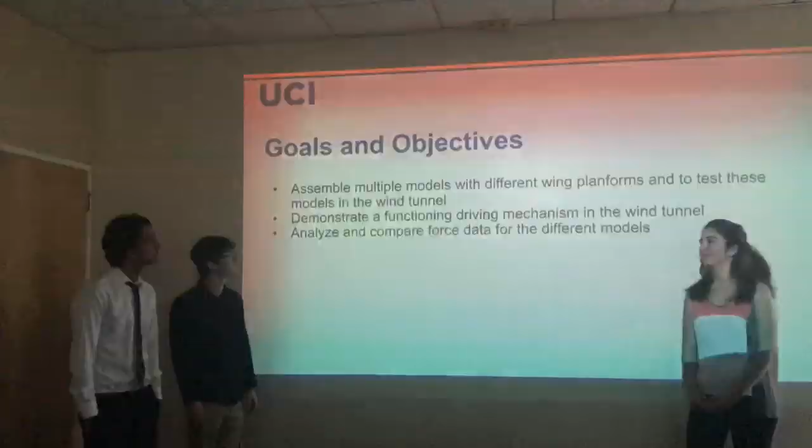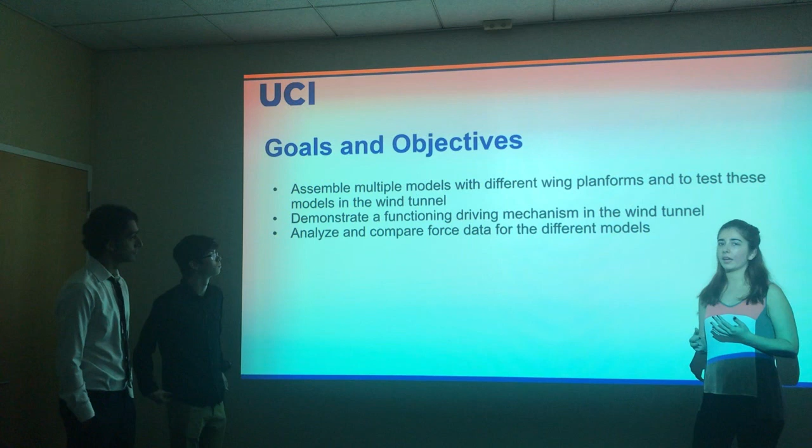So part of our objective is to create multiple models with different wing shapes and even winglets later on over the year, and so we will also be testing these and comparing the data. We are finding 4 forces, the rolling and pitching moment, as well as the lift and drag, and so being able to compare these forces.

For our design requirements, our planes need to be modeled so that they're able to hold 2 servo motors to control each of the driving mechanisms. The ailerons will be held out of phase, and the elevators will move in phase. In order to accomplish our plane assembly, we'll be able to 3D print the models and then put them together.

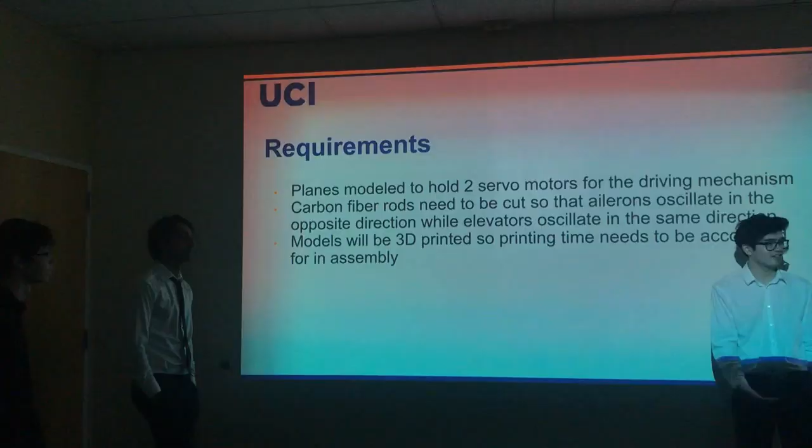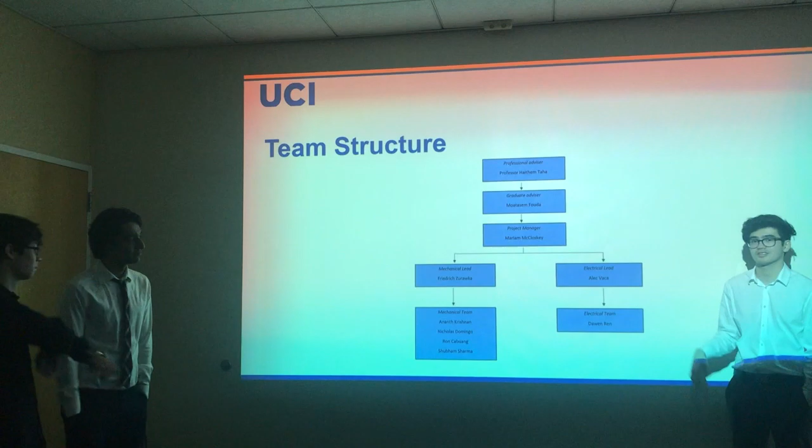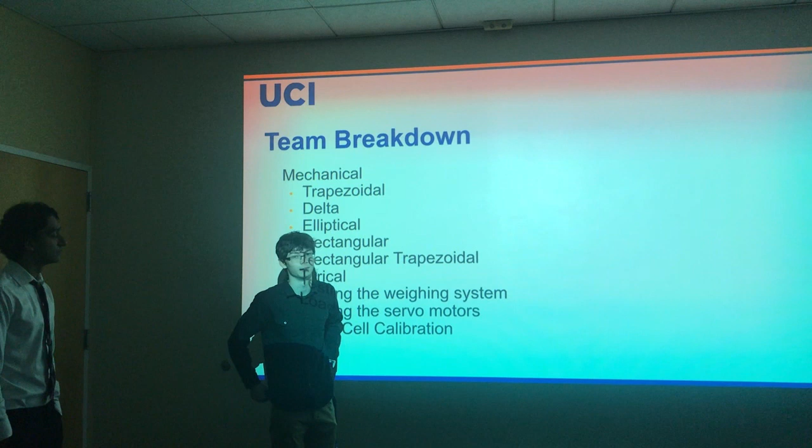For our team structure, all of us in the project report immediately to our graduate advisor, and each subsystem is broken down into project manager and then mechanical and electrical teams. Okay, so for the mechanical side of the project, our goal is just to completely fabricate all 5 plane models, which you can see here. All the names are based off of their wing shapes.

As for electrical, we basically had to create a load cell to measure all the forces on each plane for testing. So we had to calibrate it, and those, as well as the servo motors inside the planes that were driving the ailerons and the elevators, had to be tested as well.

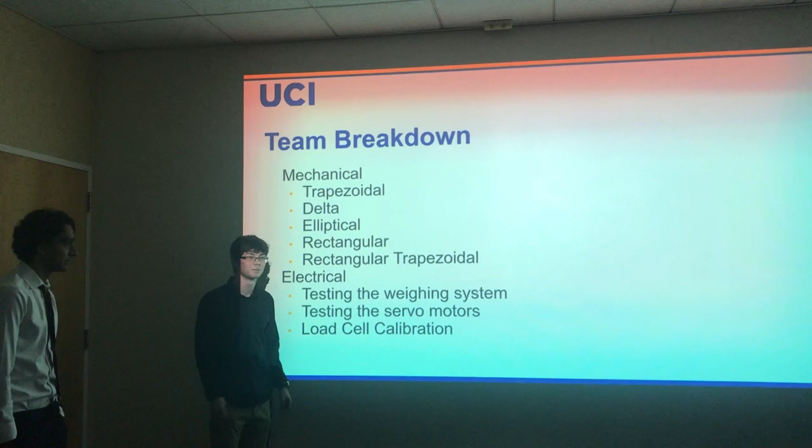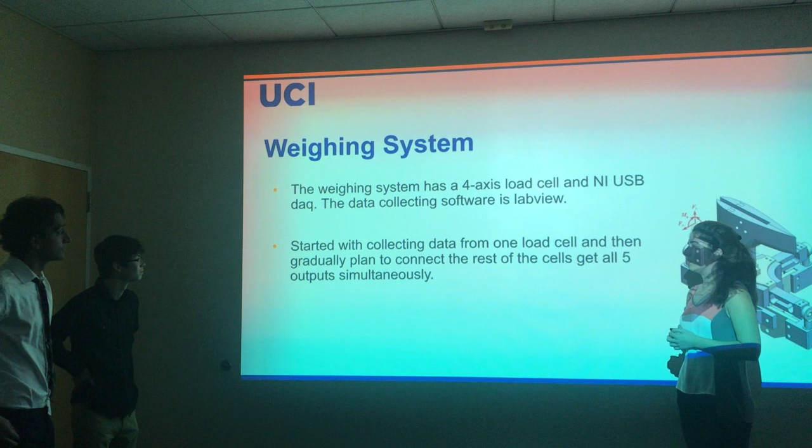Here we have our 4-axis load cell, and so like I said earlier, this will be used to measure 4 forces on the plane. It consists of 5 load cells shown here, constructed all together, and so the whole point of the system is to be able to collect the data that we need. And this has been a continual process, working on it throughout the quarter for the electrical team.

Okay, so the main difference in our models was the wing shape. We have 5 different wing shapes. Those would be rectangular, trapezoidal, cropped delta, elliptic, and rectangular trapezoidal. And the main assembly differences that these caused were the wing shape, of course, because they are different sizes. They caused differences in the fuselage, so that was our main difference in the assembly.

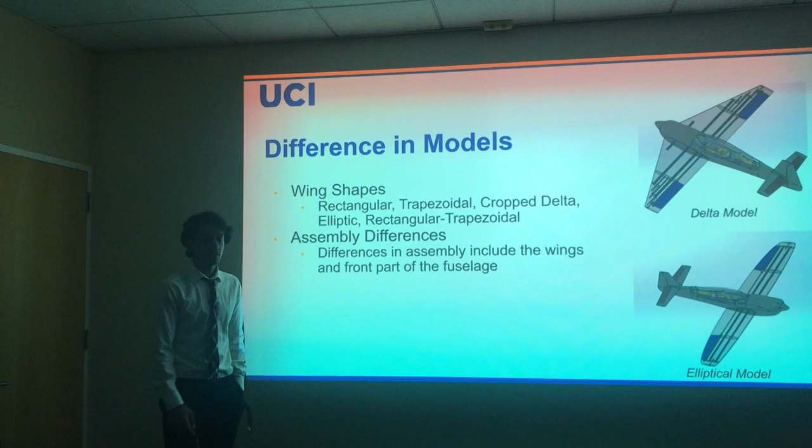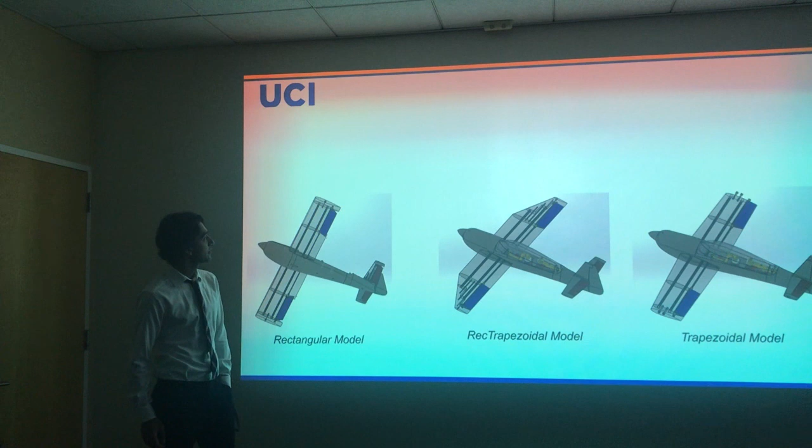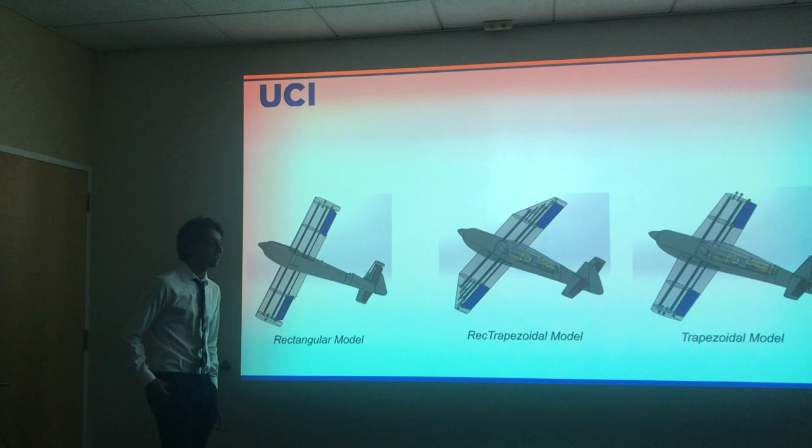And so these 2 here are our delta and elliptical models, and as you can see, the wing planform shapes are very different. And then our other 3 models are rectangular, trapezoidal, and rectangular trapezoidal. And the differences for all of these are the angles at which the wing protrudes from the fuselage. So rectangular, of course, is perfectly straight, while trapezoidal and rectangular trapezoidal have some angle.

Our timeline for the year: for the fall quarter, we aim to complete the assembly of all 5 models, as well as the driving mechanisms, as well as calibrating the multi-axis load cell. In the winter, we're going to start testing our models in the wind tunnel. So we will be finding our lift, drag, and rolling moment from that. And we also plan to assemble the winglet models.

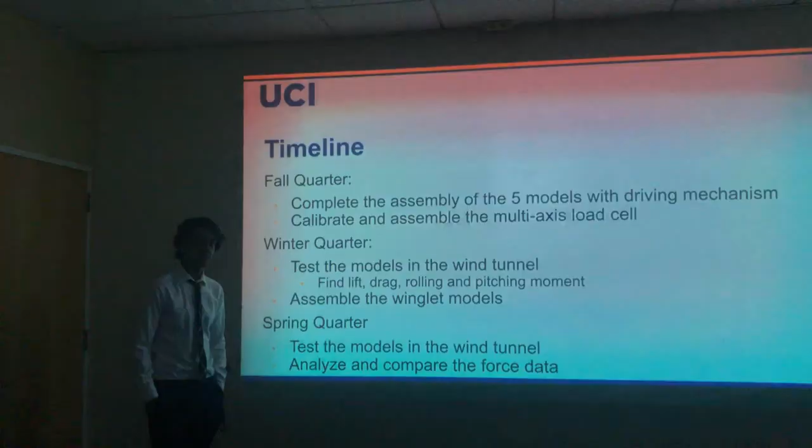And in the spring quarter, we're going to continue testing the models in the wind tunnel, as well as analyzing and comparing the force data that we obtain. As for what progress we have done, we have the delta, trapezoidal, and most of the elliptic models completely assembled and painted over. And those 3 models also have the internal mechanisms installed. We just need to finish testing all of that.

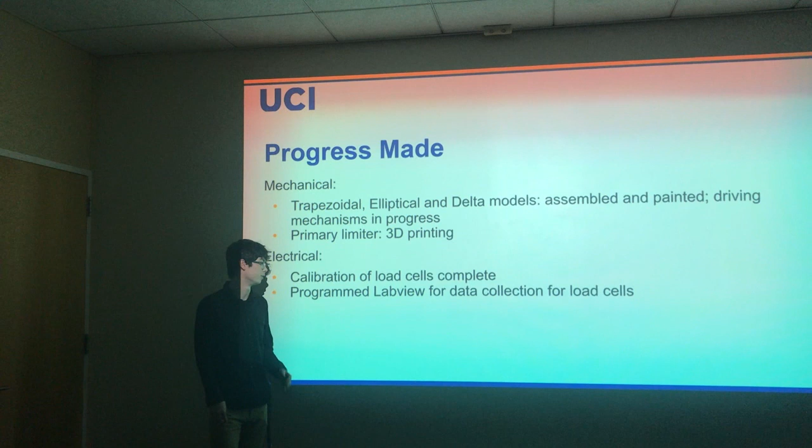And the primary constraint was the 3D printers that we were using for assembly, because for one, a lot of the parts took a long time to print, and we went through some technical difficulties with it throughout the quarter. As for electrical, we did finish calibrating the load cells, and all of the programming that was required to use LabVIEW has also been finished and successful.

So for the rest of the quarter, we're just going to continue trying to reach our original goal, which is to have all 5 plane models finished, which would be rectangular and rectangular trapezoidal. And again, we're also going to finish testing all of the internal mechanisms in the planes, including the servo motors and the degree of rotation.